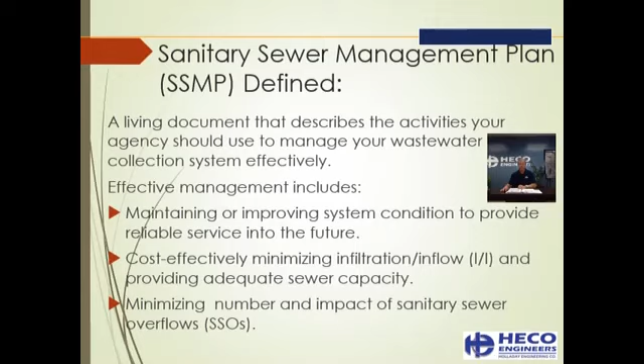The document generally is your vehicle to keep your system up to date and running efficiently. And if you can set this document up in such a way that you can reduce the SSOs and your I&I, or infiltration and inflow, then the cost of being able to run your system should also be reduced. Collection systems are the last major wastewater component that has yet to receive any type of regulation on the national level.

The federal government has developed unpublished some draft regulations. Originally in 1995, EPA convened an Urban Wet Weather Flows Advisory Committee and a Sanitary Sewer Overflow SSO Committee. Both of the committees included municipal representatives, advocacy groups, states, and representatives from EPA.

On May 29th, 1999, President Clinton had directed EPA to improve the protection of public health at our nation's beaches by developing within a year some strong national regulation to prevent the over 40,000 annual sanitary sewer overflows from contaminating the nation's beaches.

Carol Browner, the EPA administrator at the time, had signed a proposed SSO rule in January of 2001. The incoming Bush administration, however, withdrew that signed proposal, indicating they wanted to do some further review and further study before it was able to be officially published in the Federal Register for comment.

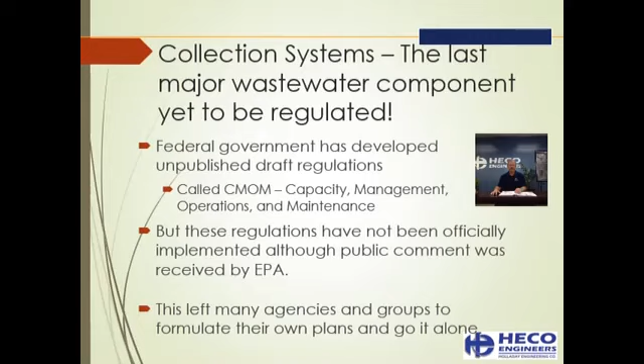As a consequence, no other regulations have ever been proposed. So from 2001 to date, there are no regulations related to infiltration and inflow and sewer system overflows. And so this has left many agencies and groups to pretty much formulate their own plans and go it alone.

Now, California in 2006 was the first major entity of any sort that decided that they needed to implement something on their own in order to deal with sewer system overflows. And so the California State Water Resources Control Board on May 2nd of 2006 put together a waste discharge requirement permit to regulate sanitary sewer systems. Their permit required public sewer collection system agencies to develop a sewer system management plan.

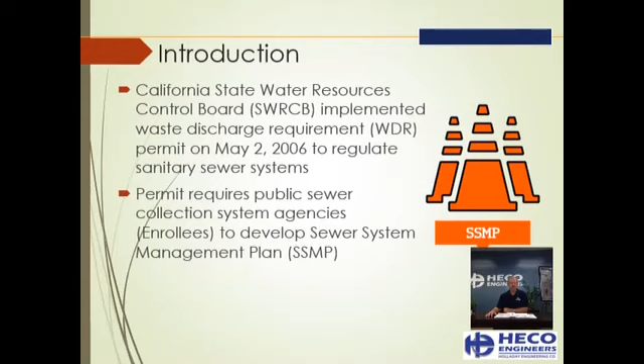And they have to be self-audited at least every 2 years and updated every 5 years. Now, what does this mean for Oregon? Well, probably not much in the context of a required entity, but it is very possible that it could be required in the future. That being said, the fact that this tool exists makes it very beneficial and has been very beneficial for those agencies in California that have adopted it and have implemented it.

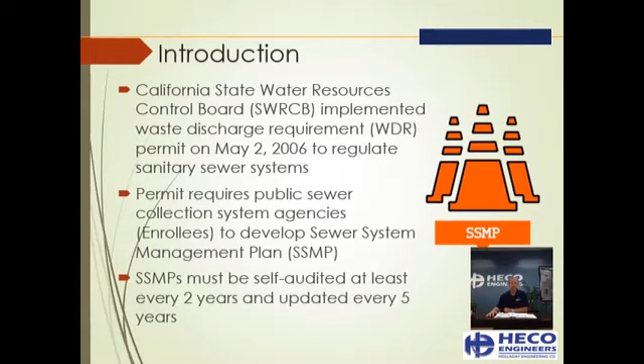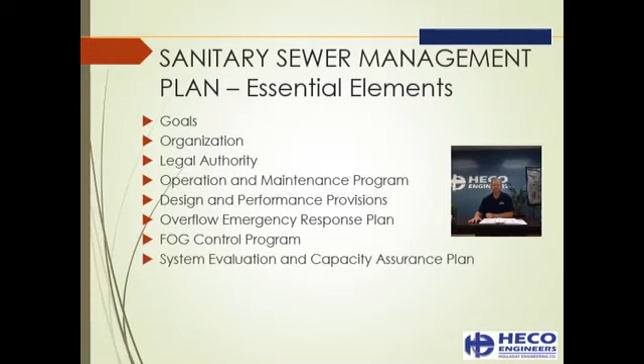Now, when you think of a sewer system management plan, there are 10 essential elements listed here: goals, your organization, legal authority, your operation and maintenance program, design and performance provisions, overflow emergency response plans, your FOG, your fats, oils, and grease control program, system evaluation, monitoring, and communications.

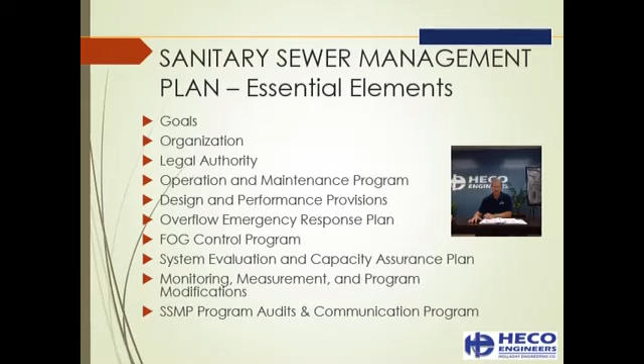Some of these items may already be present in any given municipality. The likelihood that all of them are present is hard to gauge at this point in time. But the idea of the sewer system management plan is pulling together all of these different elements into a single document that can be, as I mentioned, a living document that can be updated periodically, that allows you to coordinate these elements in a single plan and use what you've got, and then only have to worry about updating and producing what is necessary to make it complete.

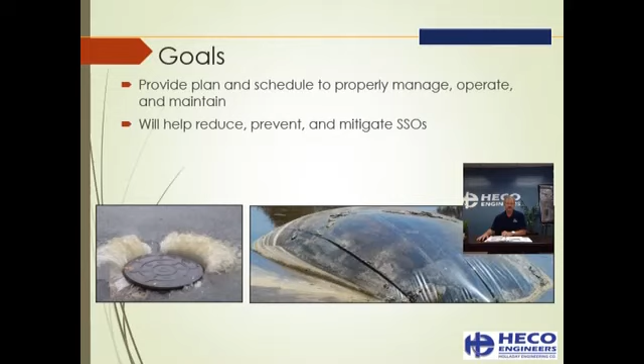So when we talk about goals for a sewer system management plan, the plan includes a schedule that would allow the municipality to properly manage, operate, and maintain. It will also help reduce, prevent, and mitigate your sewer system overflows, and it will implement programs for your infrastructure repairs, your fats, oils, and grease controls, and for the public outreach.

This goal then is really to help develop an accurate database that will allow you to determine and prioritize your major needs based upon the data that you have acquired. It should help you highlight the special needs that you might have within your system, be able to prioritize what really needs to be dealt with immediately and what could be monitored and put off for a later time. It also should help reflect in your performance, your safety, and your levels of service, and how you implement the various resources that you would direct toward dealing with the sewer system.

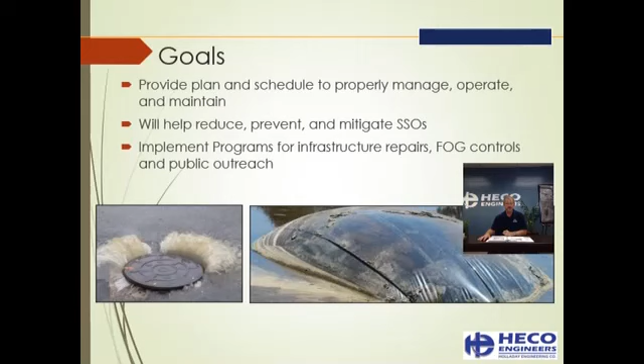Now, an SSMP identifies at a minimum the names of responsible staff and other representatives that would help implement, manage, and update your sewer system management plan, names and numbers for the people and parties that would need to respond to your sewer system overflows, and the chain of communication for reporting sewer system overflows.

Many of you hopefully have some kind of a phone call list in your offices that would detail all of these items. And in this day and age, with the advent of smartphones, hopefully some of you have even adapted that so that you have that list on your phones. You never know when you need, out in the field, to get a hold of somebody because of some problem that is being observed or has developed. But the key thing is having all that information in one particular location.

Putting together some kind of an organization chart to include in here that would visually detail who you contact and what the chain of command is would be very, very important. Key among that, of course, is keeping it updated. One of the things to keep in mind is, as people come and go with personnel turnover, hopefully your list has been updated and you keep a current list of who you need to contact when you need to contact that person.

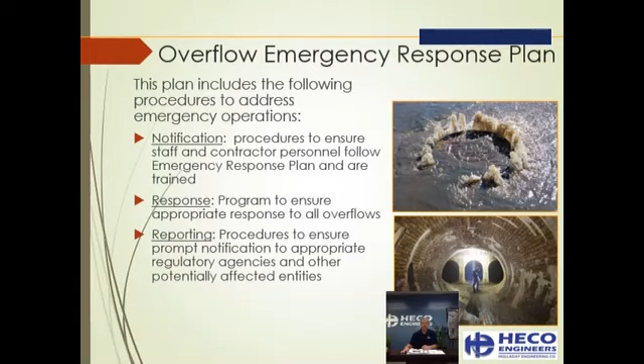The response, of course, is your program to ensure what will happen if you do have an overflow. What are your reporting procedures to ensure that the notification goes out to the appropriate regulatory agencies, as well as any other potentially affected entities. And of course, impact mitigation. What happens, how do you contain the overflow? How do you prevent any potential discharge that would adversely affect people, waterways, or other individuals?

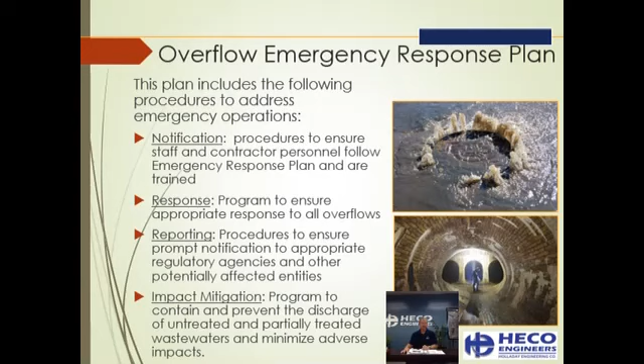The plan does not need to be organized specifically into these sections, but it must address all of these components. And usually that's left up to the municipality in terms of how they put together any specific plan. One of the key things in many municipalities is whether or not you're planning for FOG, which is fats, oils, and greases. Many of our systems in this region, of course, are not anywhere as big as you would see in these pictures.

The thing to think about is the concept of a Fatberg. London, a while back, had an accumulation of fats, oils, and greases in their mainline sewer system that was about 66 feet long, and it cost several hundred thousand dollars to remove.

And of course, in this particular case, you've got a brick-lined sewer, as shown here, and the lucky or unlucky individual had to get down there and literally shovel it out and haul it out of the sewer by hand.

Now, I realize the City of London is slightly larger than any of the municipalities in this part of the world, but London had to spend almost $2 million a month clearing buildups of fats, oils, and greases in their system. This is an expense that obviously has to be planned for and should be one of the top items on their SSMP, assuming they have one, to ensure they can adequately handle these once they are developed and brought to somebody's attention.

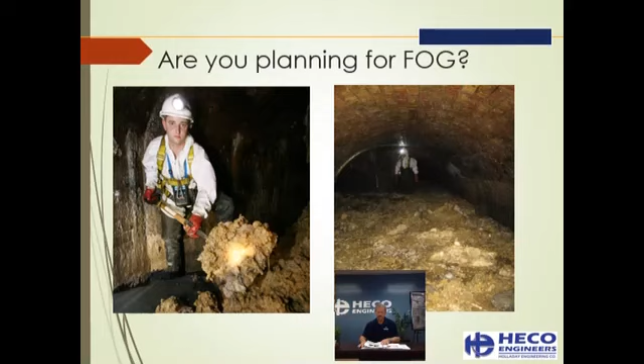Now, the fats, oils, and grease program normally should include the following as appropriate. Certainly you must identify sewer sections that would be subject to FOG blockages. And of course you need a plan and schedule for how you would dispose of that particular buildup once it is identified. What kind of legal authority can you employ in order to prohibit discharges?

Not only restaurants could be a source of these fats, oils, and greases buildups. Individual homes could also be a source. So you have to have the ability to identify measures that would prevent them from occurring and to deal with them once they do.

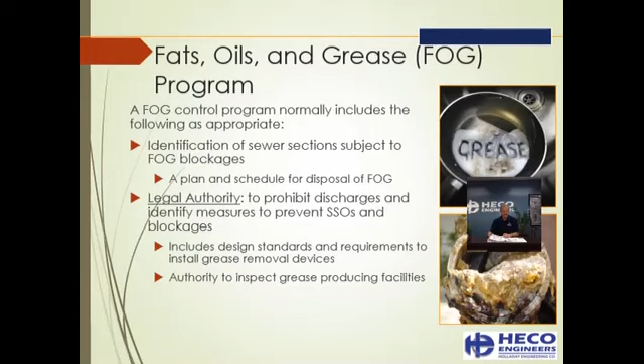This would include having design standards, requirements to install grease removal devices, authority to inspect grease producing facilities to make sure that they're complying. You have the development and implementation of source control measures, and a plan and schedule for public education and outreach.

Communication is, as you noticed in the list, the 10th item, but oftentimes communication is key to every one of the other 9 elements, including fats, oils, and grease programs. If this is something you haven't had a problem with, then developing the program document may not be that critical. But if you've had FOG buildups in the past, making sure you have all of these components in your program to deal with that becomes a very critical issue.

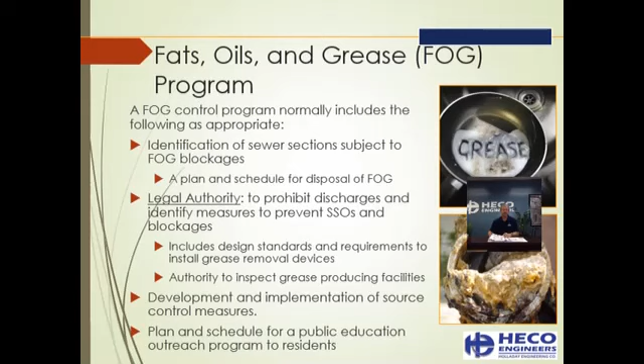Now, legal authority is one of the big issues here. The SSMP doesn't give you the legal authority in and of itself, but it should help outline what your authority is and give guidance in terms of how you should progress toward covering options in the future.

Now the SSMP should demonstrate a number of things: how to prevent illicit discharges into the sanitary sewer system, require sewers and connections to be properly designed and constructed, provide access for maintenance, inspection, and repairs, limit the discharge of fats, oils, and greases, and include some sort of enforcement action that could be taken against violators of sewer ordinances. All of these components then provide the basis for your legal authority to deal with those issues.

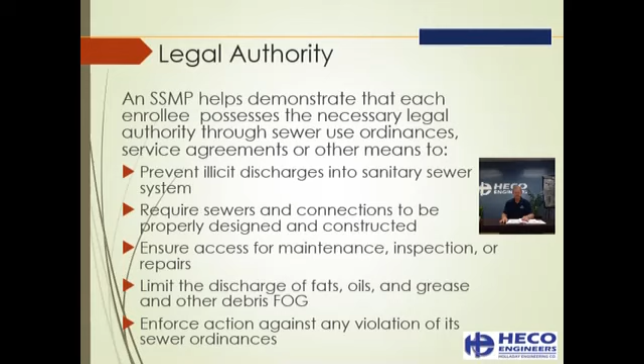The O&M program that you would have within the SSMP normally would include a number of things: some kind of up-to-date map of the sewer system, a prioritized schedule and log of regular maintenance and cleaning activities, your developed rehab and replacement plan, staff training requirements, and equipment and replacement inventories.

Not only having a map of the system, but the procedures for updating them becomes a very critical component. The rehab and replacement plan must have adequate resources identified for the O&M and repair that can be done on an ongoing basis. This requires you to have some idea of what it cost to make repairs or updates in the past, so you can project into the future, and also to have some idea of how much you need to do at any given point in time. Funding, of course, is what's going to be critical in order to make this system functional.

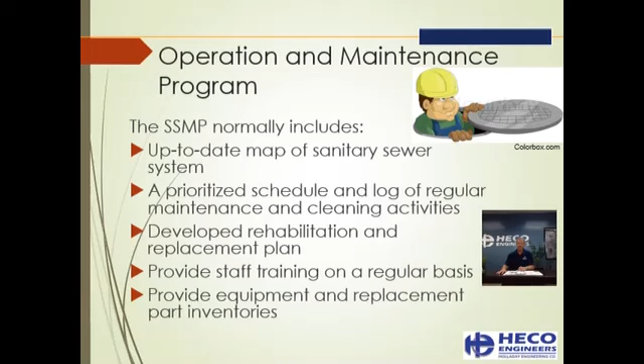There are a number of requirements determined at the state level which you can access to implement as your provisions. There are also nationally recognized sets of standards typically followed, referred to as the 10 state standards, developed by the 10 states around the Great Lakes, but generally utilized directly or by indirect reference in many systems throughout the country.

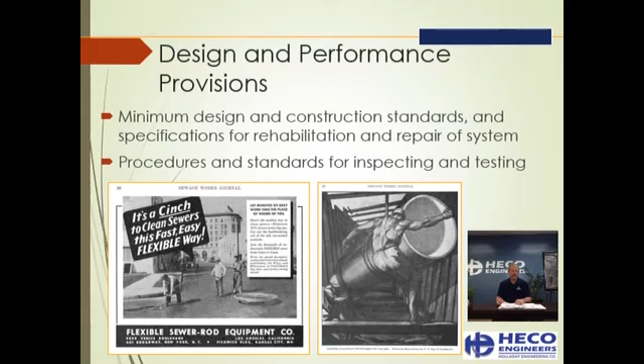In some parts of the country, this becomes a very critical issue as growth is occurring at very high levels at this point in time. In other parts of the country where people are moving from, it becomes an issue that you've got all this capacity that is no longer needed because a lot of people moved out. Is that in itself going to cause some problems?

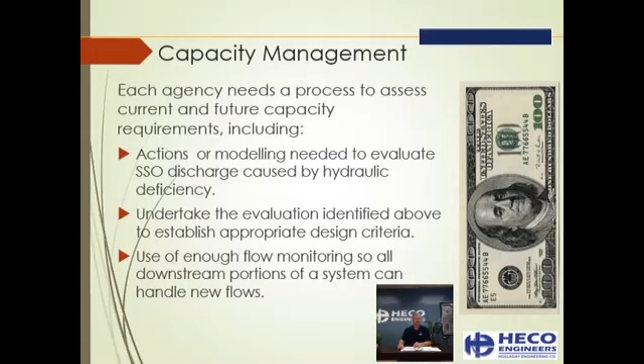Is it something that needs to be done immediately? Is it something that can be planned for over the next couple of years or even longer term? Then you publish these in some kind of list so that you can generate interest to get these projects actually done.

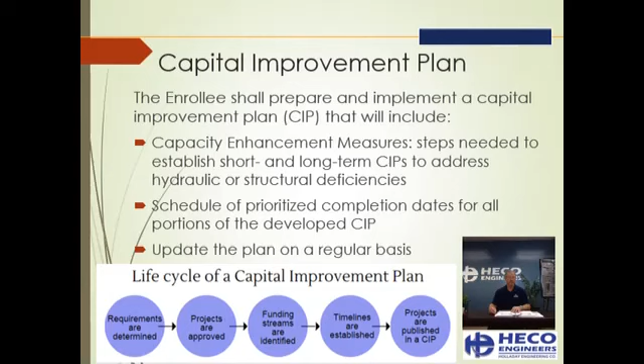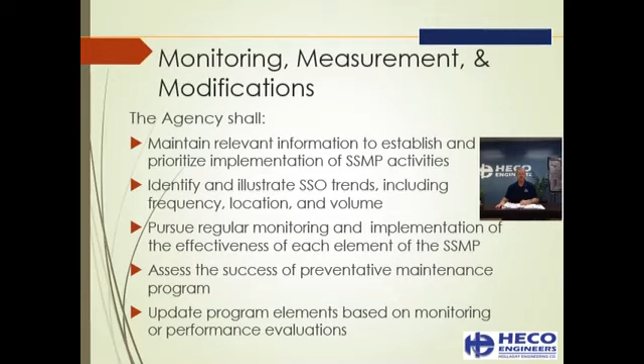You also have to assess the preventive maintenance program, keeping track of how successful it actually is. If it isn't being successful, you need to go back in and tweak it to improve its performance. You also have to update program elements based upon your monitoring performance evaluations, implemented to gather the data necessary to see the overall effectiveness of your planning.

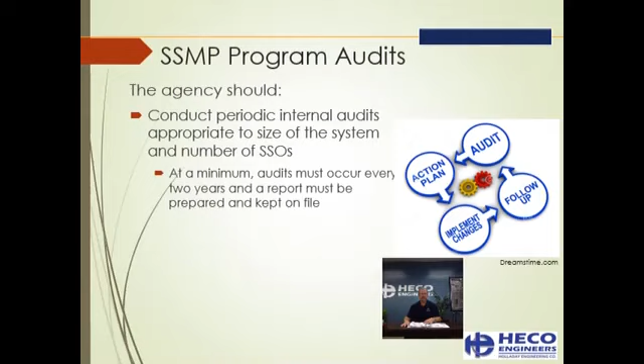Now, having implemented a plan, you typically have to review that plan on some kind of regular basis. So your overall agency should look at periodic internal audits appropriate to the size of your system and the number of sewer system overflows that have occurred.

At a minimum, you probably need an audit every 2 years, and you must develop some kind of report. Whether this is done in-house or whether you have an external agency do this for you really is up to each particular municipality. But in any event, the plan needs to be reviewed and audited. You need to keep track of what has happened and whether or not what you indicated has been effective.

Now, the focus typically is on compliance with the requirements that have been identified, and in the end, provide some kind of a summary of what revisions may be necessary to improve the overall sewer system management plan and the attainment of the ultimate goals that have been espoused from the beginning for that particular municipality.

Now, as I noted, the last element is your communications program. The agency has to communicate on a regular basis with the public on aspects of the development, the implementation, and the performance of the SSMP. The public needs to be aware of what you are doing to keep the system functioning for their benefit.

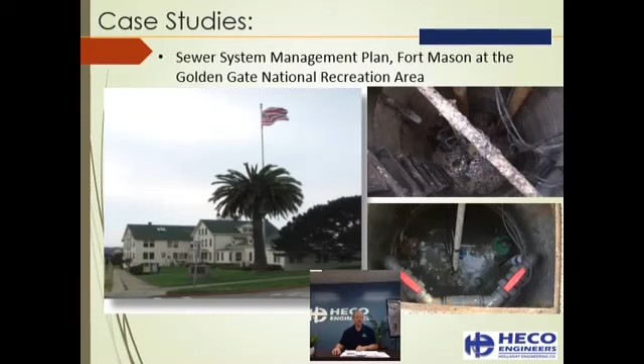And unfortunately, this is symptomatic not only of the Park Service in different locations, but there are municipalities that are probably in a similar situation. They may have a document available from the original implementation of the system, but there are not sufficient records or detailed records of any changes or modifications that occurred in the interim.

In the preparation and implementation of a sewer system management plan, then, noting that it is a living document ensures that over time the document is updated. Changes, corrections, additions are added into the system, and then when you get the changeover in personnel, you have a record of what has happened before to help you plan for what needs to be done in the future.

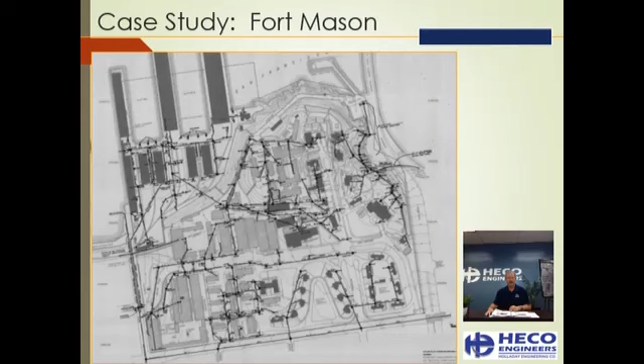In another park, Muir Woods National Monument in California, the implementation of completing a sewer system management plan determined that the existing systems, which consisted of two different lift stations at two different locations within the monument, really needed to be consolidated into a single newer station. Both of the original stations were from the early 80s in terms of implementation or construction, and with the growth in the system and the condition of the system, both needed to be replaced by a single new lift station.

The sewer system management plan study essentially allowed for determining where would be the best location to place that new lift station, how big it needed to be, and how it needed to be upgraded to deal with the existing components within the system. This provided the framework which then allowed the park to go out and secure what funding it needed to construct and actually implement that construction in the very recent past.

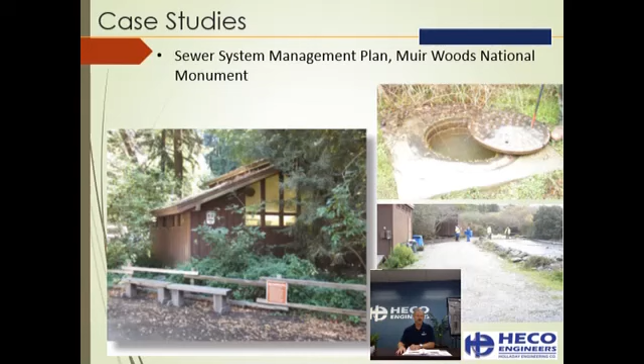Point Bonita is also located in the Golden Gate National Rec Area, and in this particular situation, when the sewer system management plan was developed for this location, it was determined that the wet well, which was a fiberglass structure, had a large crack in it that was allowing groundwater essentially to leak into the system.

Wastewater from the system is not generally treated at this location, but is piped several miles away through a combination of lift stations and the gravity sewer collection system to a treatment facility past the Marin headlands.

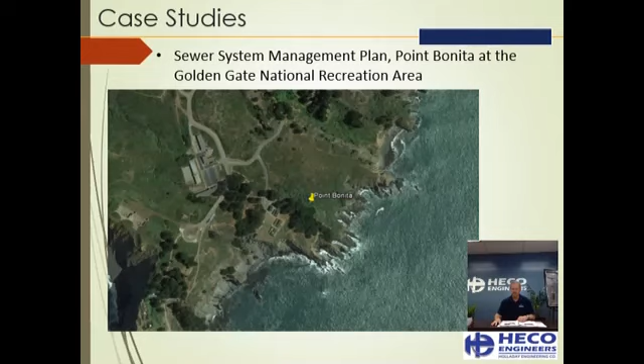It was also noticed that the main line going from the lift station was not properly sized for the area. So the implementation of the sewer system management plan provided the necessary details and documentation for how to best improve the system, ensuring the collection of waste would be done efficiently and cost-effectively. In the analysis of the Point Bonita system, it was determined there had been significant deferred maintenance opportunities associated with the wet well and many other components in the collection and pumping system.

There were also no real record drawings of the septic and holding tanks that feed into the collection system. So there were many aspects of the system where there were no records or indications of where to even find some of the various components.

Records of any existing utilities also were not kept very current or up to date. So when trying to locate whether you needed to do replacement or work in the ground, knowing whether you had water lines, electric lines, or gas lines, there were insufficient records kept for those utilities.

This is not uncommon for many utilities, especially smaller municipalities, where record keeping has not been a high priority, or where turnover of personnel means that the person who knew every problem area and issue within the system is gone without a written record. There's no way of knowing or capturing well if and when you need to worry about particular aspects of your system.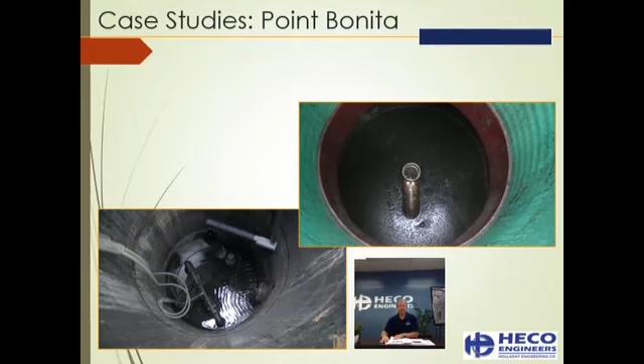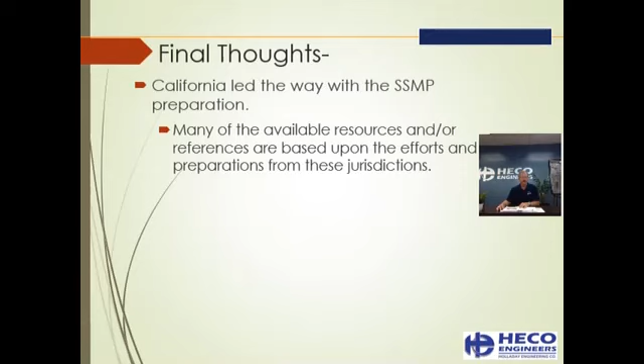When you think about the sewer system management plan, California led the way with the requirements for sewer system management plan preparation. Many of the available resources and references used are based upon the efforts and preparations from these jurisdictions.

You can basically think of any major California town, and you'd probably be able to get a copy of their sewer system management plan to review and or emulate at a scale appropriate for your particular sewer agencies. Many of these are online.

Many of them are the original documents. Some of the more current ones are from the last 4 or 5 years. Some of the older ones are maybe a decade old. Many of them are very similar in terms of form and format. Of course, the information contained is appropriate for that particular municipality, but they become a guidance document that you can utilize to try and emulate the creation of your own document.

Developing a sewer system management plan is an iterative process. It's not a one and done proposition. You create the plan today, but it needs to be under a constant review process, at least once a year as a good practice, or every couple of years, to make sure it is still appropriate.

If you're in an area, especially where you have growth occurring, it becomes even more imperative to make sure that new additions to your system are able to handle and are built to the proper standards, and are not going to become a source of problems down the road.

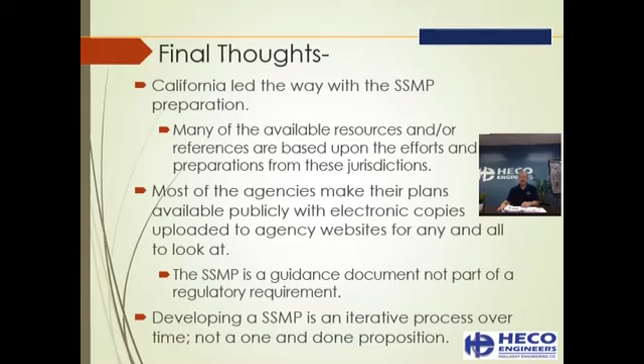Documentation failures will help identify any problem areas during the sewer system audits. In any event, anything that does occur should be viewed as a training opportunity, allowing you to better improve your sewer system management plan and come up with a document that will serve you for many years to come.